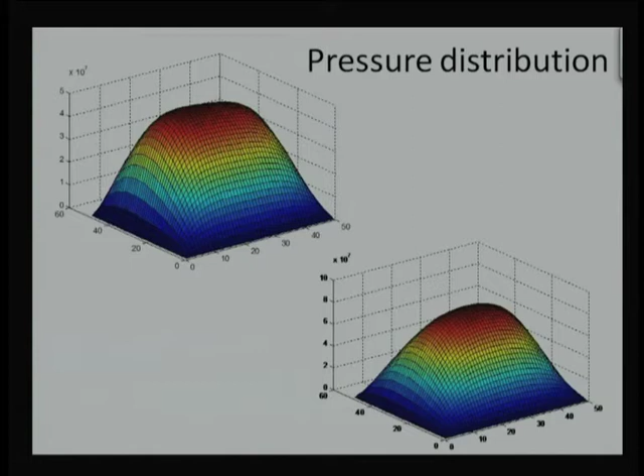The reason was given like this: if you do not consider elastic deformation, the pressure profile will turn out like this. It reaches a maximum value and comes down to zero. It is more like a parabolic distribution, an offset parabolic distribution.

If I consider elastic deformation, the maximum value of pressure is reduced, but that reduced maximum pressure value will be spread over a much greater angular extent toward the sliding direction. You can see that this maximum value remains for a greater extent of the space variable compared to the previous case. So elastohydrodynamic lubrication is important.

If we are able to incorporate elastic deformation in any design and combine it with the hydrodynamic lubrication mechanism, that will give an optimized tribo pair.

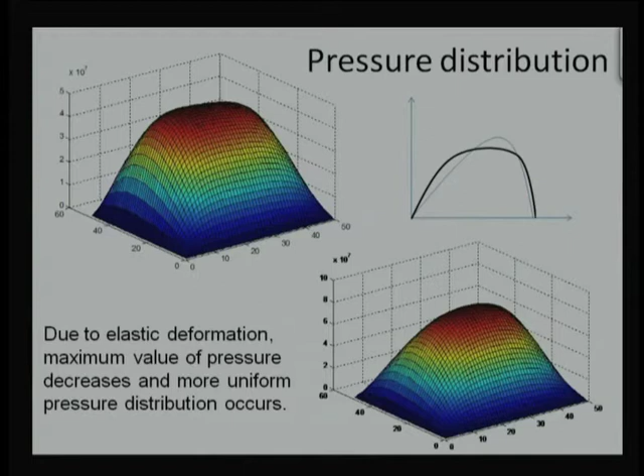Today we are going to discuss the thermal effect. So the question comes, why should we consider thermal heating?

We have mentioned that wherever there is a full film, there will be some shearing of the liquid, but does it really cause too much of a problem? Fluid film lubrication is used to minimize the coefficient of friction, but here we are thinking about how even slight friction is going to affect performance.

To add to that, we again refer back to our table which was discussed in the previous module on lubrication. This table showed different oil grades: 10W grade, 20W grade, SAE 30, SAE 40 - W stands for winter grade - and this is a multi-grade like 10W30, 10W40, 10W50. These are viscosity grades as given by SAE, the Society of Automotive Engineers.

What these two columns are indicating is the viscosity, absolute viscosity in millipascal second. The first column gives viscosity at 40 degree centigrade, the second column gives viscosity at 100 degree centigrade. The third column, which is only partially filled, gives some sort of percentage variation or what the final viscosity will be in that case.

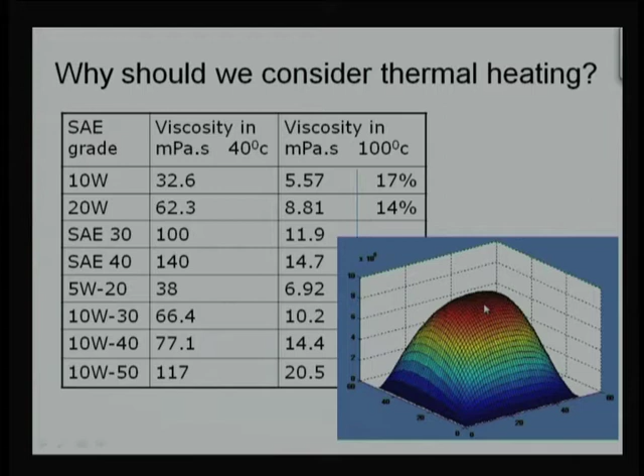It comes out to something around 5.8, or 58 megapascal. Now, if I account this viscosity, you see that even though the viscosity grade is same, maybe in one case the tribopair was operating at 40 degree centigrade, and in another case at 100 degree centigrade. So this viscosity should be accounted, which is 5.57 millipascal second. You can see there is a huge variation or decrease in load carrying capacity or maximum pressure.

From 5.8, it comes out to 0.8, that is a huge decrease in maximum pressure value. That means if temperature changes, viscosity as a result will change, and if there is a change in viscosity, load carrying capacity is going to be much lower. Based on this comparison, we can say this load carrying capacity or pressure distribution variation is just only 14% of the original pressure variation.

That means 86% is a decrease. Now, viscosity decrease: we said viscosity at 100 degree centigrade was 17%, and if we use this viscosity, load carrying capacity turned out to be only 14%. So viscosity is still higher relative to load carrying capacity, but we can roughly say load capacity is proportional to viscosity. If there is a reduction in viscosity, load capacity is going to decrease, or there is more possibility of metal to metal contact.

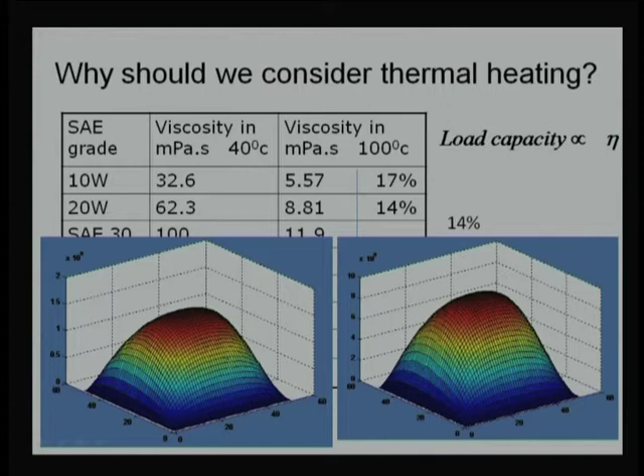This is the reason why we should consider thermal heating. We should account for thermal effects, either coming from outside external sources or generated within the system, whatever it is, we should account for it. The question comes, how to account for these thermal effects? Is there any means? Yes, there is a means, what we call the energy equation, a simple heat transfer equation which we have studied many times in fluid mechanics.

Whatever energy is generated or passed to the system, it should be convected away, conducted away, or radiated away. So there should be some thermal equilibrium equation or heat transfer equation, and that can be a combination of a number of equations also. As a simplification, if I assume there is no radiation effect, we can say this is the convective term, conduction term, and heat source term.

Heat is added with this term, heat is conducted away using this term, and heat is convected away by these terms.

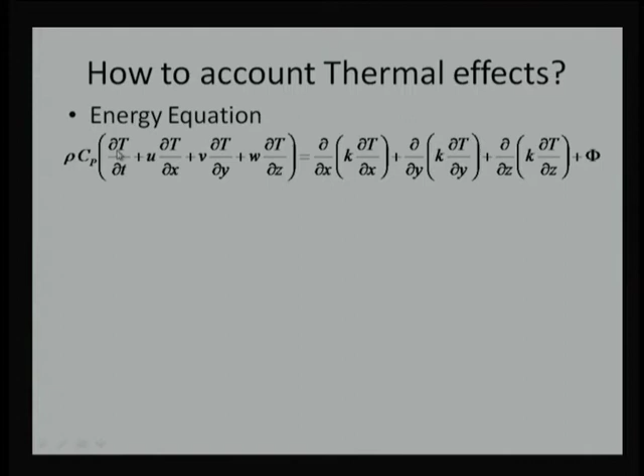Now this is the temperature variation with time. Generally, we account for this when the heat source itself is fluctuating. Sometimes it gives a heat of say 50 watts to the system, sometimes 75 watts, sometimes 25 watts. So when phi is changing with time, naturally there will not be a consistent temperature, there will be continuous variation in temperature, and we should account for that.

However, if the system is steady and the heat source remains consistent, whatever energy is added will be added continuously, it is not removed or discontinued, then we can neglect this term.

Then these three terms are: velocity in the tangential or sliding direction, velocity in the normal direction between the tribopairs, and velocity in the perpendicular direction relative to the sliding direction. This is the heat conducted in the x direction, heat conducted in the y direction, and z direction. We are assuming the bearings or tribopairs are in the x-z plane, and the gap between those tribopairs is in the y direction.

So let us give some sort of expression for the heat source. This whole equation is energy per unit volume, and the heat source term is also energy per unit volume. This can be given by the shear stress, or the shear resistance shown by the liquid or fluid we are using, multiplied by the velocity gradient.

Now if we give a nomenclature to these symbols, we say that this is the density, which means density is going to play a role. Lubricant density, expressed in kilogram per meter cube. This is the specific heat of the lubricant, I am emphasizing it is of the lubricant, expressed in joule per unit kilogram and Kelvin.

Now if I multiply density with Cp, what I get is joule, kilogram will be cancelled, joule per unit meter cube per unit Kelvin, and Kelvin appears everywhere so that can be cancelled out. This is per unit time, and this is also per unit time, because meter per unit second per meter per second, meter will be cancelled out, so it turns out to be per unit second. This also per unit second, and all four terms will be in Kelvin per unit second.

And this is joule per unit second, which turns out to be watt, and overall this expression will turn out to be watt per unit meter cube. That is why I say this whole expression has been expressed in terms of watt per unit volume. We should not get confused with the units.

Now the interesting thing is that this K is the thermal conductivity, often mistaken. When we use the conduction term, K comes as the thermal conductivity of material 1 and material 2. No, in this situation we are not accounting for the material conductivity, we are still in the fluid film zone, only in that zone. So this thermal conductivity of the lubricant will not be as high as solids, but we need to account for it.

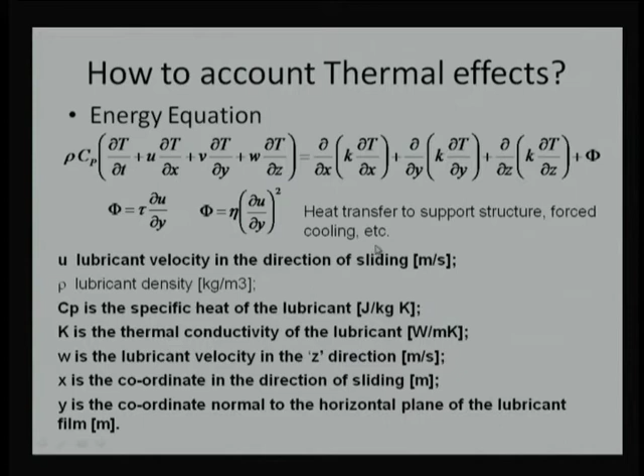Even on those computers, this overall equation will take days to get any answer, not seconds, minutes or hours. It is going to take much longer time. That is why we are neglecting it for the time being. But whenever the situation comes, we say there is thermal heating outside the tribopair and we need to account for it. Take an example of an IC engine: outside temperature is very high and maybe the tribopair does not reach that high temperature, so we need to account for this temperature, or if there is forced cooling with water circulation around the tribopair, we should account for those things. But to generalize and include this here is difficult. Whenever the situation or application comes, we will account for this.

Now, the time to simplify the energy equation. As I said, we are not considering the second heat transfer equation, we are still on the simplified energy equation, and we want to further simplify it. We want to neglect this term, it is the transient solution, we do not want to go ahead with that, we want a simple solution. So this term is neglected in this case.

The second simplification: now I will account only for the tangential velocity along the x axis, not any other component. So these two terms will also be cancelled or neglected. So from so many terms we have reduced one term here, and now we have further reduced two terms. So three differential terms have been neglected.

We know there is a gap, and the film thickness happens in this gap. We are assuming this surface is sliding and this surface is stationary, and this film thickness is in microns while the sliding distance is in mm. So conduction is predominant only in the y direction. This is the y direction, this is the x direction, and perpendicular to the monitor, perpendicular to our configuration, is the z direction. So variation or conduction in the z direction is negligible, and conduction in the sliding direction is negligible compared to conduction in the film thickness direction. So we will consider only this effect.

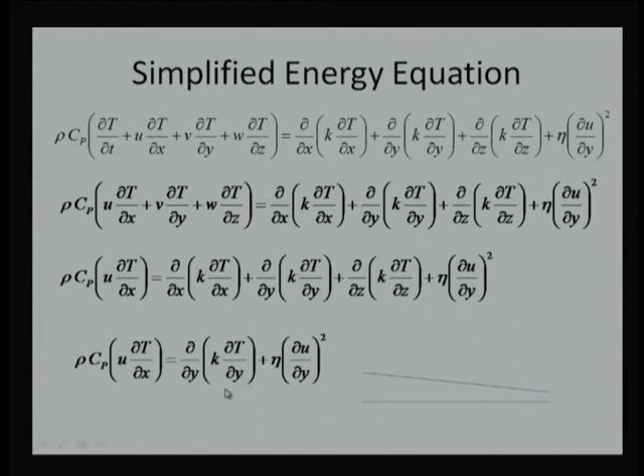So the simplified energy equation accounts for convection in the sliding direction, conduction along the film thickness direction, and heat generation along the film thickness direction.

Now, what are the difficulties? I have already simplified so much, and still there will be some difficulties. I want to elaborate and discuss this with you. Is it really as simple as hydrodynamic lubrication or elastohydrodynamic lubrication? I have seen a number of articles where people feel that elastic deformation or accounting for hydrodynamic lubrication is much more complex compared to incorporating thermal effects. But in my view, accounting for thermal effect is much more laborious, involves much more work compared to elastic deformation or pressure distribution using the Reynolds equation, and that is why I want to mention this.

In this case, the first thing is how to find out the thermal conductivity of the liquid. We know liquid is subjected to pressure, molecules become closer, and heat conduction should increase. Now, if there is some sort of streamer formation or air bubbles in the liquid, happening in a divergent domain, what will happen? Thermal conductivity of the liquid will come down, will reduce. So thermal conductivity of the liquid cannot be constant, but accounting for that is pretty difficult.

A number of models have been suggested by researchers. For the time being, we have to assume K is constant and not going to vary, because in this case we are not introducing pressure immediately. Of course, it will be done iteratively in a sequential manner, but not directly. If we say K depends on pressure and we try to incorporate it, it is again going to be very long, lengthy, laborious work. So for the time being we are assuming K is constant. That is the first difficulty, an unjustifiable assumption.

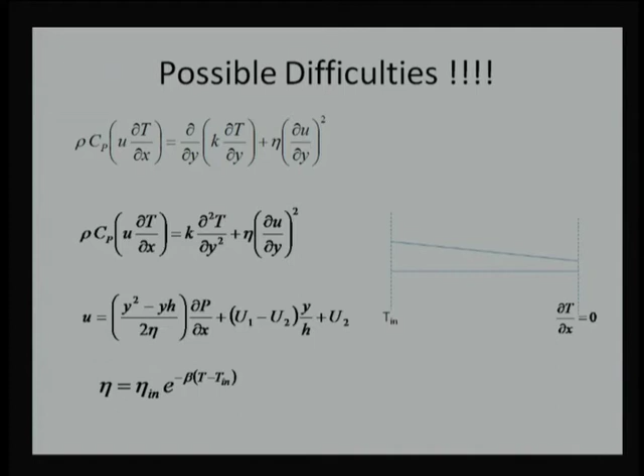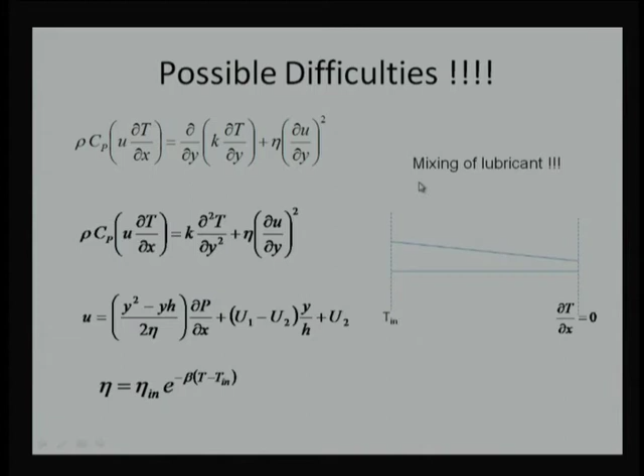There are other difficulties also, and of course, this is what already I mentioned, the mixing of lubricant. There will be lubricant supply and there will be backflow, and there will be some mixing of that. After mixing, the temperature at the entrance will be different, but we need to account for that flow, backflow conditions. This is another difficulty.

Meshing. What we did in hydrodynamic lubrication, we did meshing in x direction and z direction, and we kept del x equal to del z, or del x bar equal to del z bar. We try to keep the same spacing, but you can see here there is a convergence, there is a continuous reduction in spacing available to us. We cannot say there will be 6 nodes here, 4 nodes here, and 2 nodes over here. That will make a lot of difficulty for the finite difference method.

Other option is that let us say all the number of nodes are same at this junction, this junction, this junction, almost every junction, number of nodes are same. If I do that, what is going to happen? This spacing is continuously decreasing, and that is happening with the slope. It is nothing like I take some absolute value and then some definite decrement. This decrement is going to happen with the slope. Everywhere spacing is going to change, and in computer program we need to account for that. At every node spacing is going to change, and it is very difficult to find out an element area as such, unless we do some approximation.

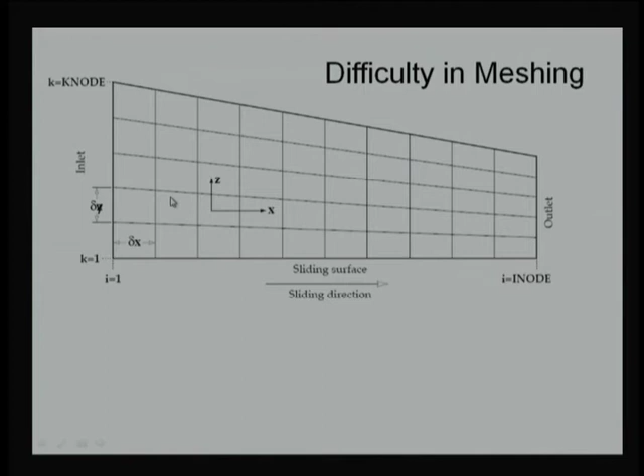In other words, this was a much simpler situation. What we did with hydrodynamic lubrication, x direction, z direction equally divided, rectangular mesh, no problem, we can account for it. Because for simplification we say that del x bar is equal to del z bar, there was not much problem, while here the problems are there. We have to account for this in the computer program, and inaccuracy will also change. Of course, one justification can come that towards a decreasing direction temperature is going to be higher, so spacing should be lesser. From that point of view, it is justifiable from an accuracy perspective, but the degree of difficulty getting in is on a higher side, and we need to do proper programming for this purpose.

There are other difficulties, what we call directionality. Computer program does not know which side temperature is going to be higher, and in numerical iterations, any time one iteration goes wrong, the whole solution turns out to be wrong. That means we need to give some directionality. We need to tell the computer program, as we are moving towards x direction, there will be an increase in temperature. Our easiest way is that you divide into zones. Say there is a north zone, a south zone, a west zone, and an east zone.

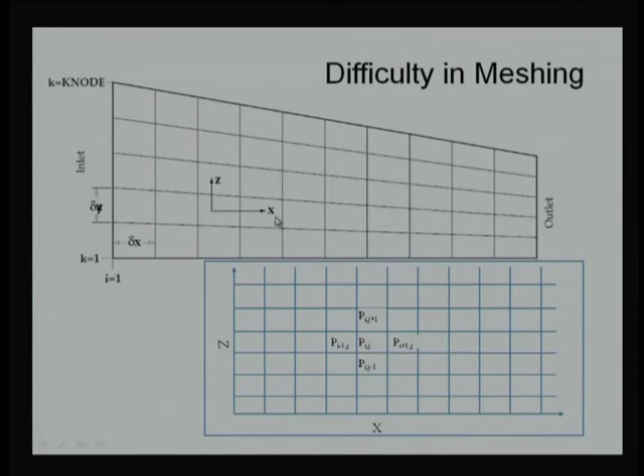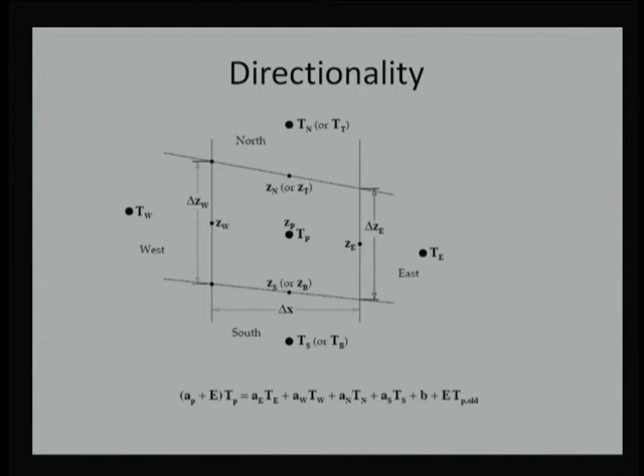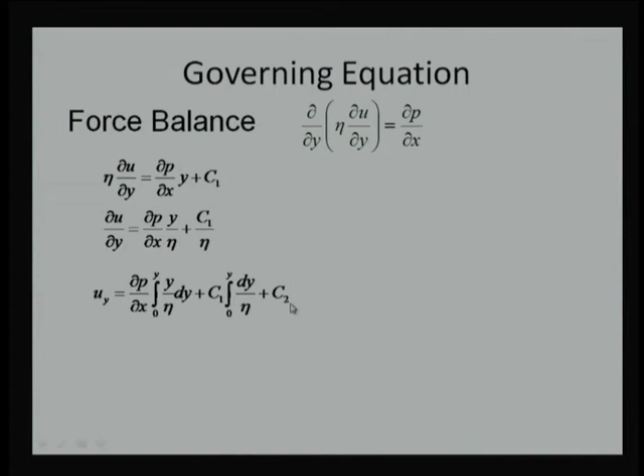What we need to do is use two velocity conditions. For simplification, we assume that the lower surface has a velocity u and the upper surface velocity is 0. Keep in mind, earlier we kept both velocities u1 and u2, but to simplify this expression we are assuming one surface is stationary, it is not moving, so its velocity is 0. When velocity is 0, calculating the expression for the integration constants becomes much simpler. So to simplify, we are using this boundary condition.

Now, using these two boundary conditions and substituting, we get the result that C2 is equal to capital U2, and C1 turns out to be an expression in terms of pressure variation and viscosity variation, where the viscosity variation is not known to us. We do not have any relation for it right now. If we have a relation, we can substitute and integrate it, but otherwise we have a problem. Now, with these two integration constants, we can substitute and find out the expression for u.

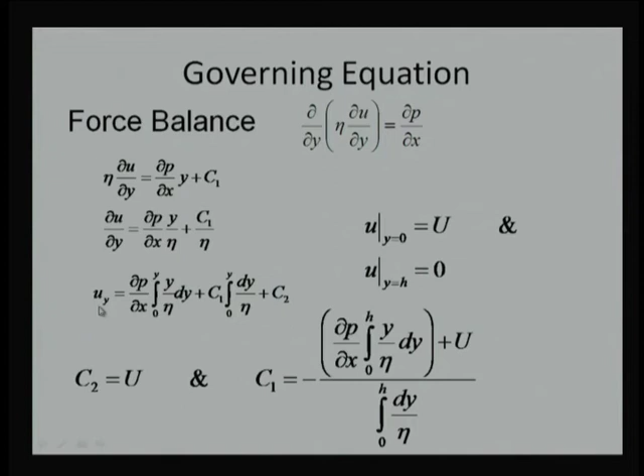We can use the continuity equation. As we have done in hydrodynamic lubrication, we merged the force equation with the continuity equation. So we are doing the same thing here. Earlier, in the previous slide, we solved the force equation, now we are solving the continuity equation.

On the simpler side, we assume these two terms are negligible, otherwise the expression will be much lengthier and more complex to understand. So for simplicity, we say this term is negligible, this term is negligible for the time being. If W is not active, or there is no velocity perpendicular to the sliding direction, then this term will be negligible, and since there is no squeezing action or turbulence, this velocity will also be 0 and is not going to change. So there is only one term remaining.

Now, to utilize this, we will be using this u expression which we have derived, along with the C1 and C2 constants derived in the previous slide. So we are using those things.

To simplify this expression further, we separate the u term and the dp by dx term. Say dp by dx multiplied by some factor m, and velocity u multiplied by some factor n. So m and n can be figured out by rearranging this equation. If I do the rearrangement, m comes out through a series of integrations, and this is the term we need to solve to get the velocity profile.

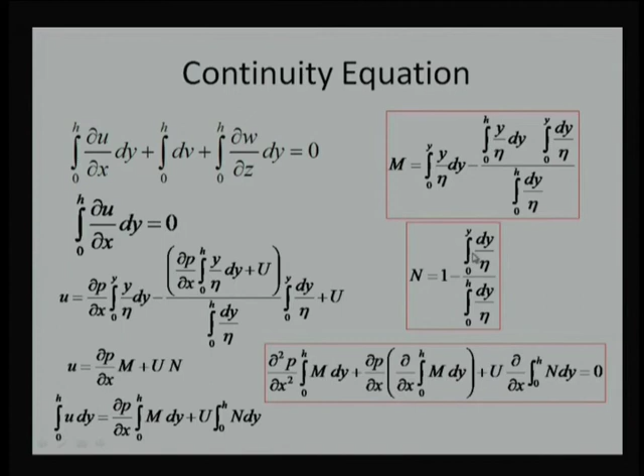Similarly, this term u, the differentiation of n dy, the integration of this - as we do not have this integration values available to us, we cannot differentiate easily. So the whole thing focuses on what is the relation of viscosity with y, and we do not have any relation. It has to be represented in terms of temperature. Once we represent the temperature, this equation and the temperature or energy equation should be simultaneously solved, which is a complex term requiring many iterations to reach the right solution.

We can do a number of examples on this. We can integrate and substitute what we call the thermohydrodynamic lubrication mechanisms, and I have a couple of cases available which show how to crack this problem. So I am going to show 3 examples, with real data available and results obtained for these 3 examples.

Say we are taking the example of a journal bearing. How it works, we are going to discuss in the next module on the application side, but just for completeness I have shown this diagram. Let's assume there is a shaft and this is a bearing, and the shaft has a radius R2 and the bearing has a radius R1, and they have some clearance.

Obviously R1 is greater than R2, and this clearance is represented as C, and here the value given is R by C. The radius of either the shaft or the bearing do not have much difference, it is in micron difference. This ratio is 637, that is the ratio given to us, and the length of the bearing is defined - what I have shown is the cross section, assume perpendicular to that will be the length. The length is given as 70 mm, and the length by diameter ratio is given as 0.7.

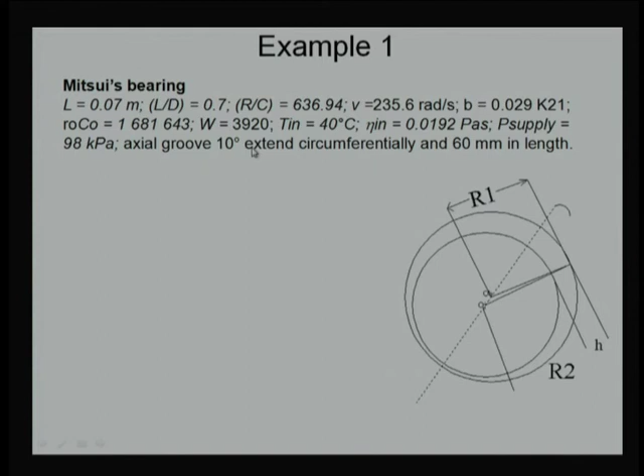And we have 10 degree circumferential extent and 60 mm length. So what is the purpose of giving this example? We say this needs to be done with some experiment and more theoretical calculations. So some experimental data are available: the applied load is 3920 Newton, and the maximum temperature on the surface measured was something like 56 degrees centigrade.

Input temperature is 40 degrees and maximum temperature is 56 degrees - that means there is a 16 degree temperature rise, and sometimes 16 degree temperature rise can reduce the viscosity by 30 to 40%, which can reduce the load carrying capacity or the parameters. However, this is one of the very lightly loaded bearings, which can be judged from this eccentricity value - eccentricity value lesser than 0.5 is known to be lightly loaded bearings, and we are able to see this when doing a THD analysis.

T is thermo, H is hydrodynamic, and D is dynamic - thermohydrodynamic lubrication. Here we are using a boundary condition: the isothermal and adiabatic condition, where the rotating element is not going to vary in temperature because there is a high convective term in that, so it remains at a constant isothermal temperature. While the stationary surface is not going to conduct any energy to the other surface, so that is the adiabatic surface. So here the boundary condition has changed - we are using an iso-adi solution.

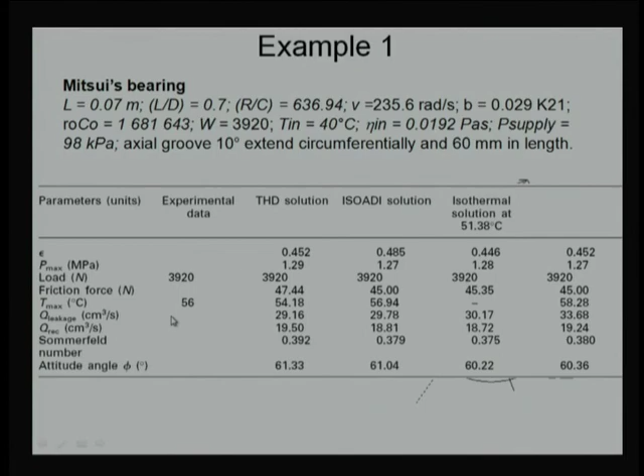So we need to account for the flow condition in this case, and when we derive the hydrodynamic condition or elastohydrodynamic lubrication or thermo-hydrodynamic lubrication, we are not accounting for this recirculation liquid, the liquid which is getting recirculated. We should account for that. However, developing a general expression for all these conditions is not possible.

That is why we take specified applications and solve this from an application point of view. We can take a roller bearing as an application, cam follower as an application, gears as an application, journal bearing as an application, and then we apply these algorithms. We know most situations will be simplified, not necessarily will the gear pair show similar behavior, or the roller bearing show the same behavior as the journal bearing.

This will be having very specific equations with assumptions specific to the applications, and the solution will not be as difficult as it appears. We will be discussing that kind of solution in our next module on application, utilizing whatever we have learned in fundamentals of friction, wear, lubricant, lubrication mechanisms, Reynolds equation, or elastic equations, applying them to get better results with better understanding.

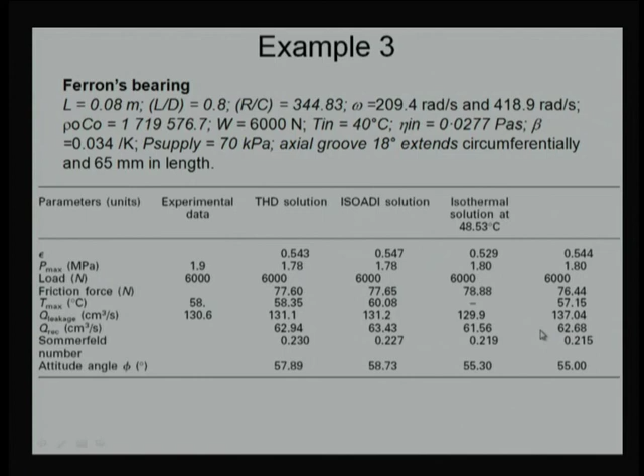In short, thermohydrodynamic lubrication generally needs to be specific to application. Whatever equations we solve should not overburden our computer program, but after understanding the application we can simplify those equations and get a good solution. We need to know the boundary condition properly; many times boundary conditions from experimentally measured data will give good estimation.

As far as possible, we should account for elastic deformation, because that is going to give a lesser pressure, as we have seen in the previous slides where maximum pressure value was lower. We have considered only the dissipation within the liquid, and have not considered heat transfer within the solid surface. As far as possible, if the situation permits, we should account for that too.

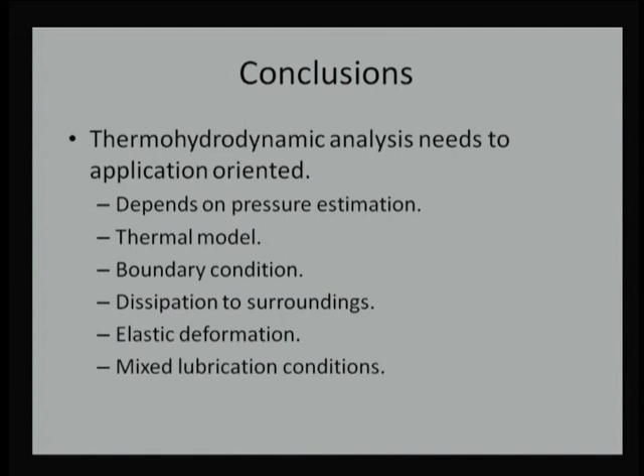In short, it is slightly demanding to think that we should get a complete TEHD solution involving thermal, elastic and hydrodynamic lubrication mechanisms. But if the application is like a gear application, we need to account for all these factors to estimate the right load carrying capacity. If we do not account properly, there is a possibility of wrong estimation which will not give good results. So it depends exclusively on the application which equations are properly fitted. But we cannot generalize and use all equations together to get a solution; that will take much longer time and may not give fruitful results.

Thank you, thanks for your attention. We'll consider or discuss application-oriented models from next lecture onward.